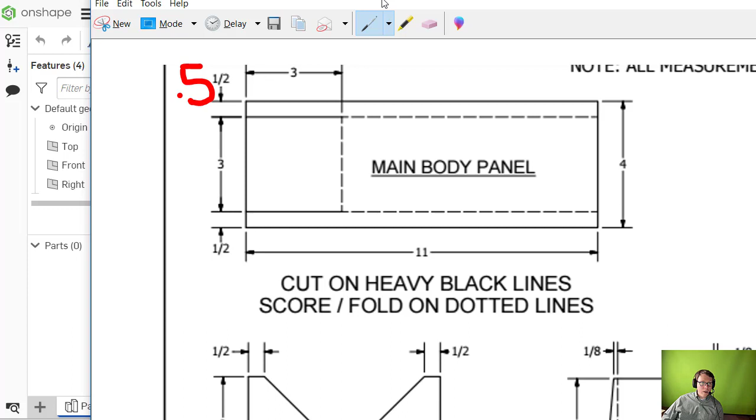We want to make sure we have them in whole numbers or in decimals. So 1/2 is going to be 0.5. When we look at the bottom, we have another 1/2, so that'll be another 0.5. Now 1/8, let's convert that: 1 divided by 8 is 0.125.

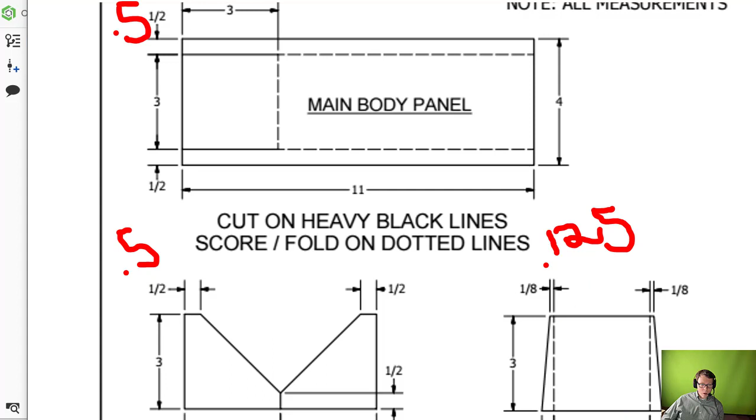0.125. We also have, if you look farther down, 3/8. So 3 divided by 8 is 0.375.

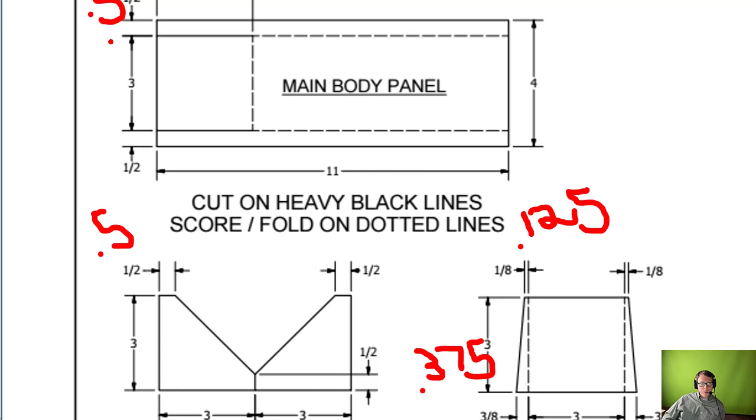So now that we have all of our measurements, either in whole inches or in decimals, we're ready to look at our Onshape. Let's go ahead and open Onshape. We have the name of our document, skimmer body.

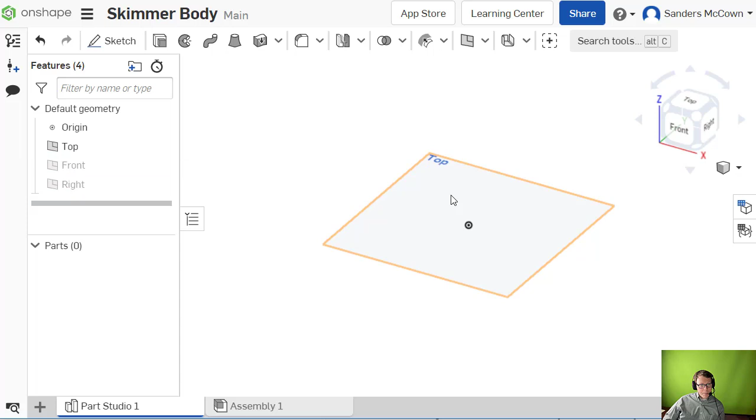We're going to go ahead and hide the front and the right views, go to the top view, and come up here to sketch. We're going to select center point rectangle and draw something here.

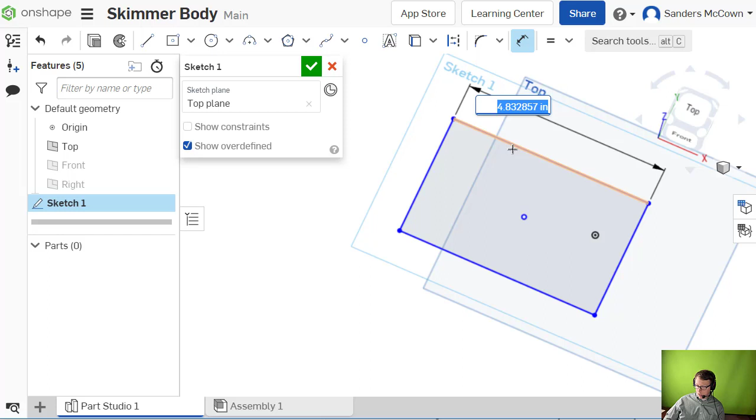Now what we're going to do is dimension this. We want to select our dimensions, and we're going to make this 11 inches, by 4 inches.

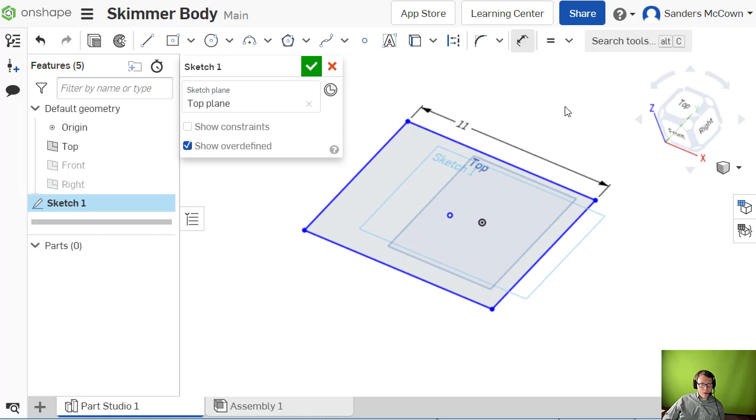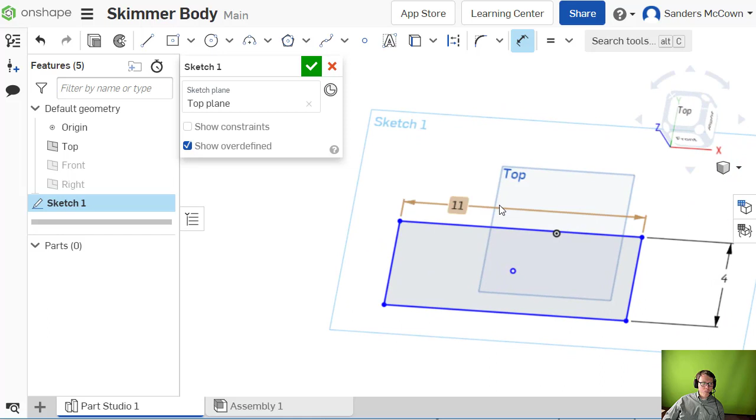So we come back to ours, and I'm going to rotate my view. I'll do another dimension on this one. Click here, pull it out. We want that to be 4 inches. So we now have it 11 by 4. And we'll say yes, accept that.

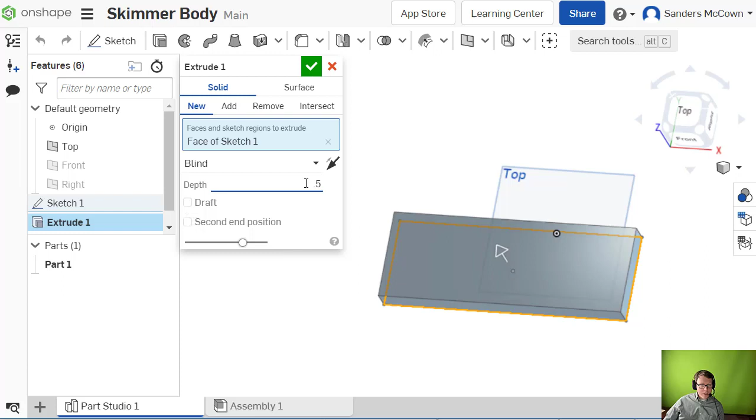Now we will click and select it, and we're going to extrude it. That extrusion, if we come back here, is 1/2 an inch, because this is going to be the side wall. So we're going to come down here, do 0.5 and enter, and accept. Now we have our base piece.

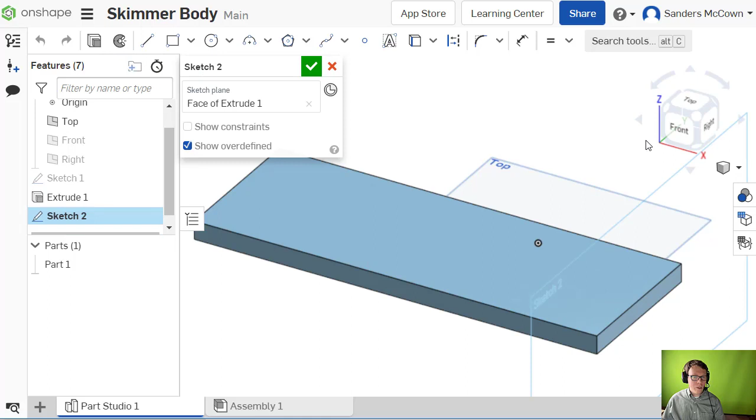Now it's time to cut out the center part of our skimmer body. I'm going to click on that face and say sketch. I'll change my view so I'm looking straight at it. If I hold down Control and right click, I can pan. I'm going to zoom in a little bit with my mouse. Now I'm on this face doing a sketch.

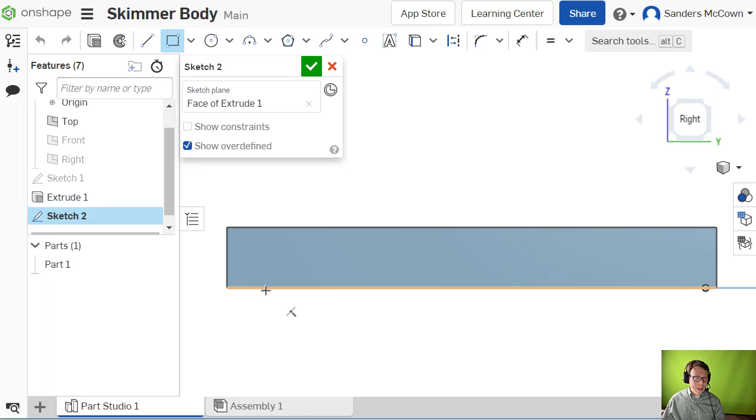I'm going to come up here to the rectangle tool and the drop down, and select this corner rectangle tool, and select the bottom line. See how it's highlighted? Click and drag it. I'm not going to take it all the way because we need to dimension it.

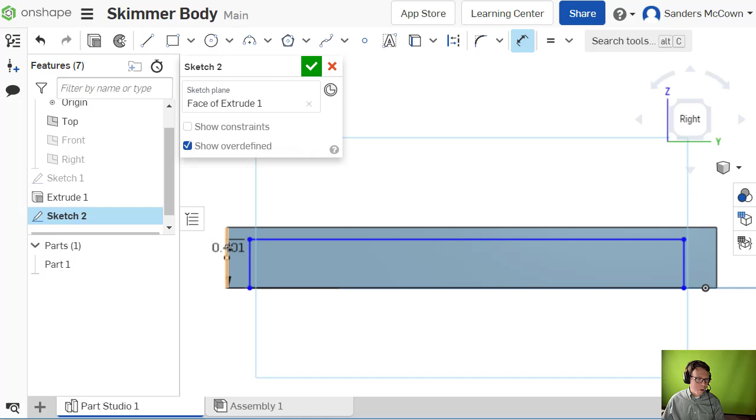Once I have that, I come over here with the dimension tool. I'm going to click the side, and click the side of our shape, making sure the whole part is highlighted. Bring it down, and we're going to say 0.02 thickness. Now it resizes the rest of our shape.

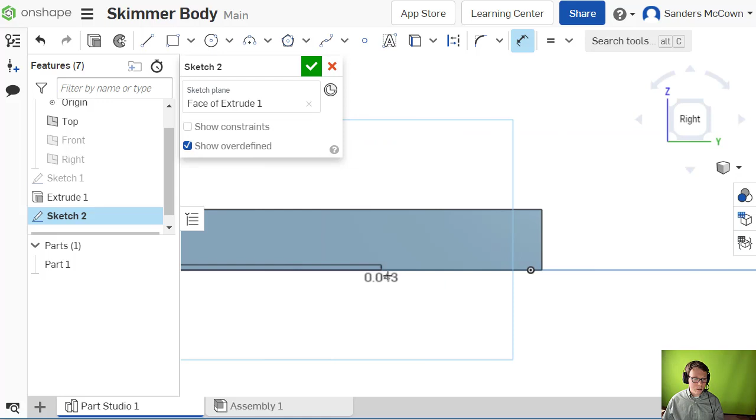So I need to zoom in, select it, zoom out, select this other side, pull it down, 0.02, enter. Zoom in, take the top to the top, pull it out to the side, 0.02, enter. So now we have the entire area.

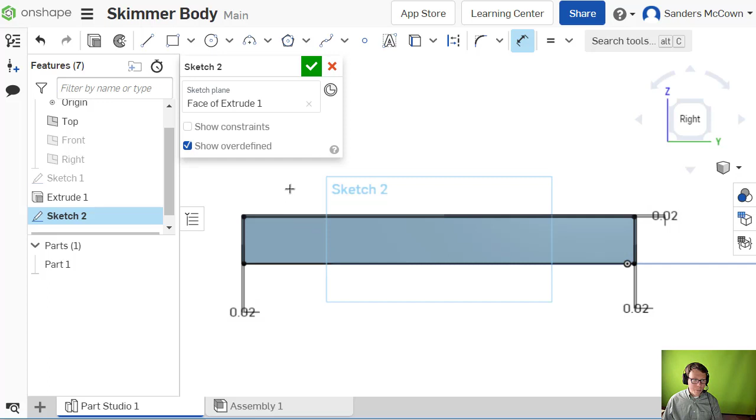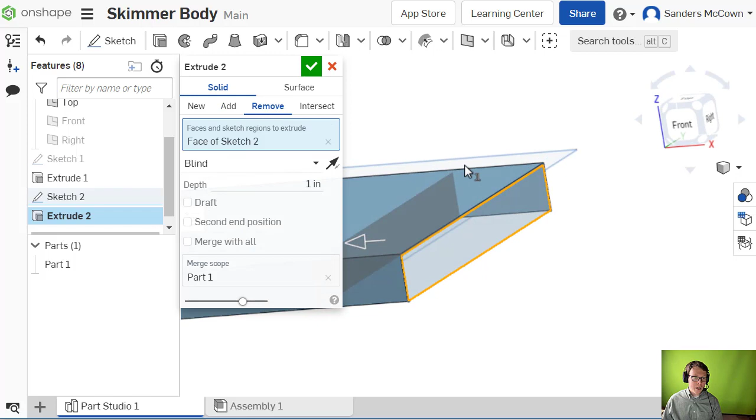Now we don't want to add to this, we want to cut this part out of our skimmer body. So I'm going to go ahead and check. Now I'm going to click on our sketch and go up here to extrude. And we want to remove. So I'm going to check and adjust my view.

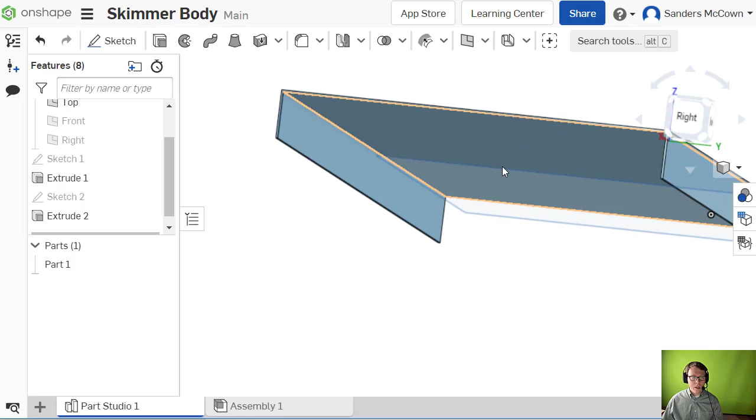See the arrows pointing the other direction. The whole length is 11 inches. I'm going to do that, and check it. Now, if you rotate around, you should see the whole part is cut out. So we have our body of our skimmer.